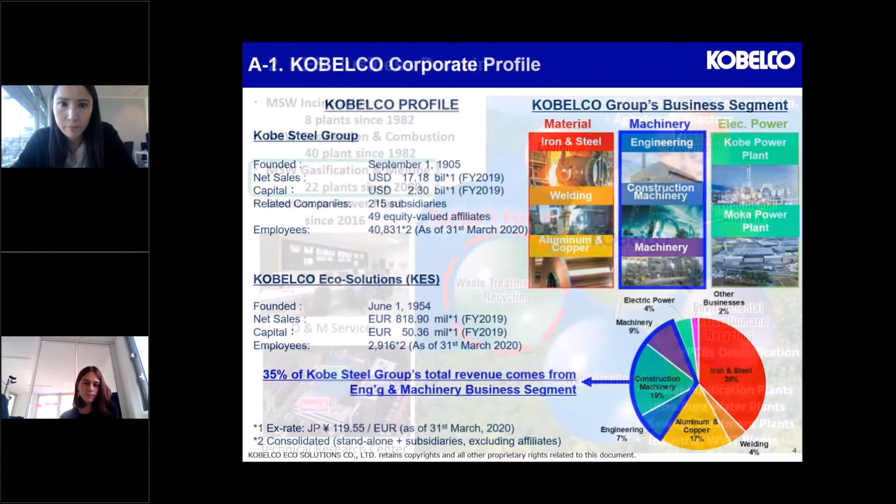Our main business is so-called environment plants. Our core business is water treatment plants, which I will talk about more later. We also do environmental restoration and recycling, such as PCB detoxification; process equipment, including glass lined reactors and hydrogen related business; environmental analysis and cooling tower. Lastly is our focus, which is waste treatment and recycling.

We have a couple of technologies for waste treatment. We have 8 incineration plants since 1982. Also we have 40 plants of gasification and combustion since 1982 as well. And lastly, the technology we will be introducing today, the fluidized bed gasification and melting furnace plants, of which we currently have 22, the first plant starting in the year 2000.

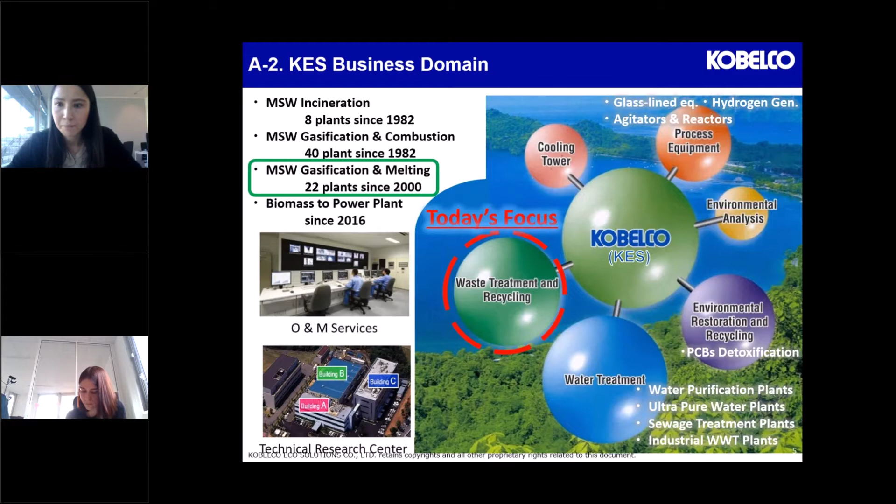This is just to focus a little more and show our water and waste technologies from top to bottom. Regarding water treatments, we have water purification plants, including tap water and sewage treatment plants for wastewater from large to small scale, including industrial water. Then we have sludge treatment plants for the residues of wastewater treatments. This sewage sludge can be fed to a waste to energy plant, which will be explained later.

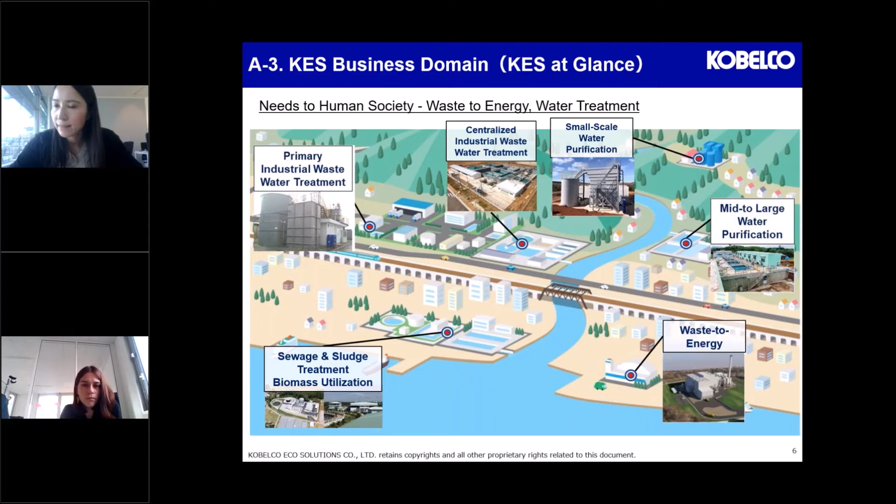Most of our business has been inside Japan for decades. However, since around 10 years ago, we have started to expand overseas. Mainly in Southeast Asia, we have offices in Vietnam, Cambodia, Myanmar, and a project office in Thailand. Also, we have 2 waste treatment plants by licensing in South Korea. And the most recent office, opened in 2019, is in London, in order to expand our business in Europe.

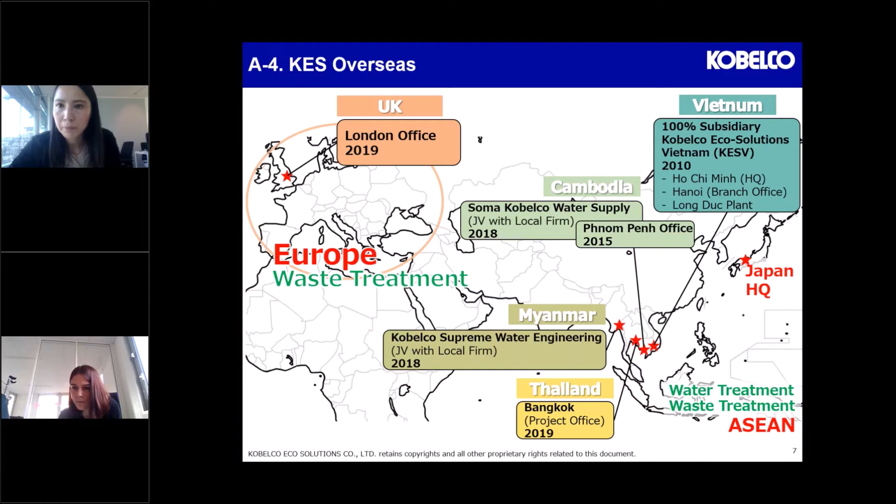These are the list of all the fluidized bed and melting furnace plants in Japan.

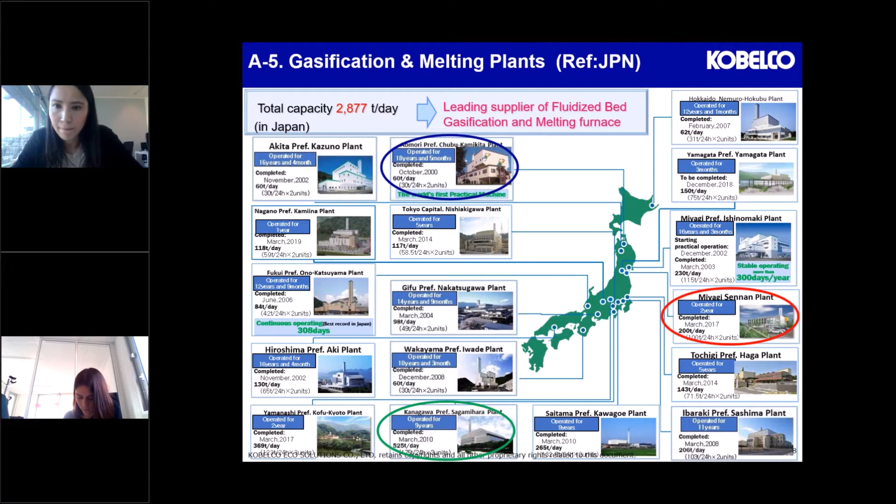Outside Japan, we have plants in Thailand and 2 plants by license in Korea. Most recently, the Hooton Bio Power project in northwest England, just south of Liverpool. This is our largest plant, processing with 2 lines, altogether 600 tons of waste per day.

Feedstock pit has a capacity of 240,000 tons and is able to export 200 gigawatt hours per annum. Construction is at its final stage. Drying out castables has just finished, and waste should start being fed within March, possibly even early next week. Very exciting time for us.

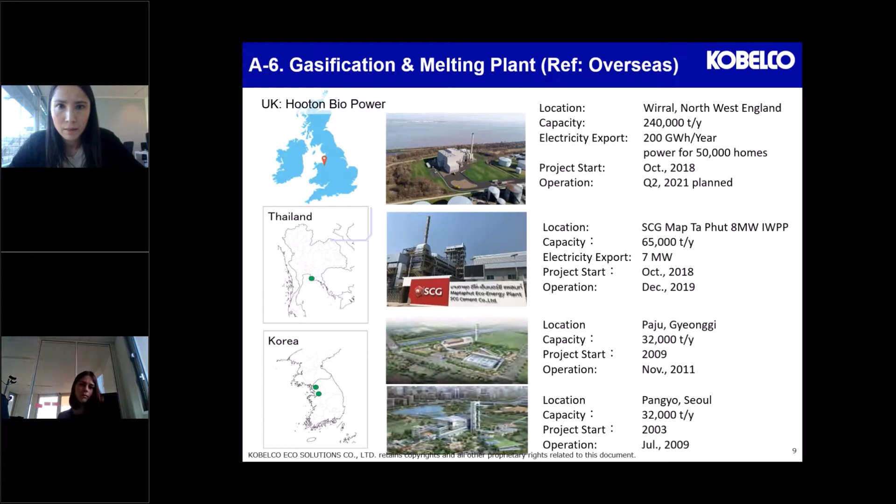Before moving forward, a quick description of our waste treatment technologies. We mainly have three types, as I mentioned briefly before: grate type incineration, with 8 plants; fluidized bed gasification combustion, with 40 plants; and fluidized bed gasification and melting furnace plants, with 22 plants.

One advantage our gasification melting plant provides is that only limited pre-treatment is needed. The feedstock needs to be shredded to approximately 15 centimeters by 15 centimeters, but that is almost all that is needed.

This means we can take a wide range of waste streams, including residual MSW, C&I, and fines from RDF, which otherwise would be landfilled. Based on experience in Japan, feedstock also includes water sludge, waste dug out from old landfills, and bottom ash from grate incinerators.

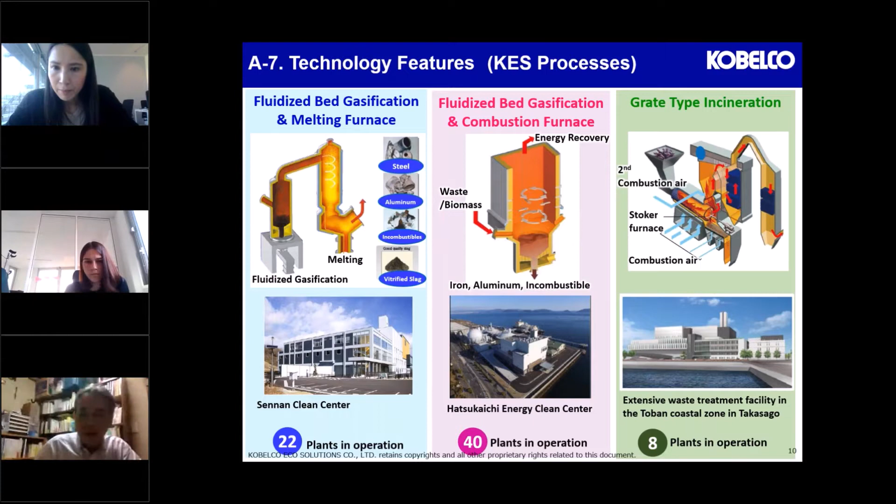Another main factor which makes the technology special is its byproducts. First, we are able to recycle metal, such as aluminium and steel, from the gasifier. The metal comes out clean and dry, making it easy to handle for its next life. In some cases in Japan, they feed metal waste intentionally to clean it up.

Also, after the gasification process, vitrified slag is produced from the melting furnace. This vitrified slag, a new material in Europe, is fully expected to be given end-of-waste status under the EU Waste Framework Directive. Tests are being carried out in the UK.

Currently, technologies to make use of vitrified slag are developed in Japan, such as asphalt pavement, blocks, and so on. By reusing the vitrified slag, potential landfilling can be avoided.

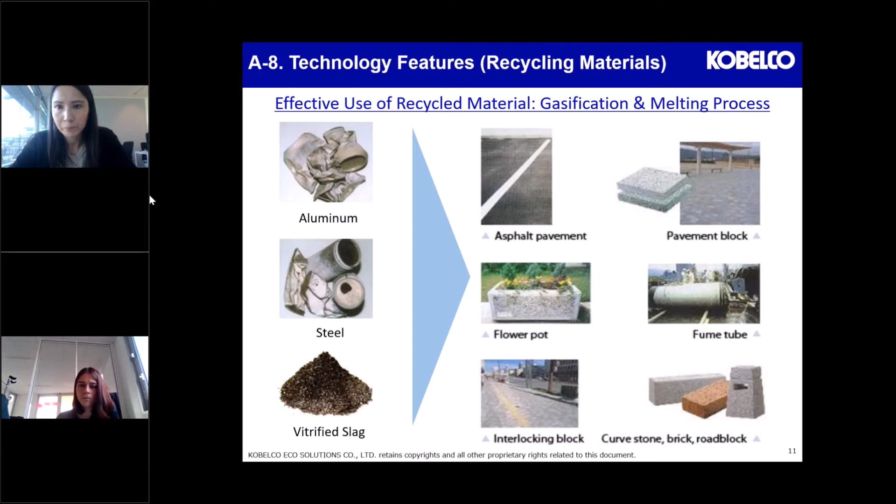To conclude the overall picture: we get good thermal recycling, waste flexibility with minimal pre-treatment, which leads to producing recycling materials and reducing landfill. We also accept unusual feedstock, such as fines from RDF, and do not require support fuel such as coke to be added. This is a proven technology of more than 20 years with 22 records.

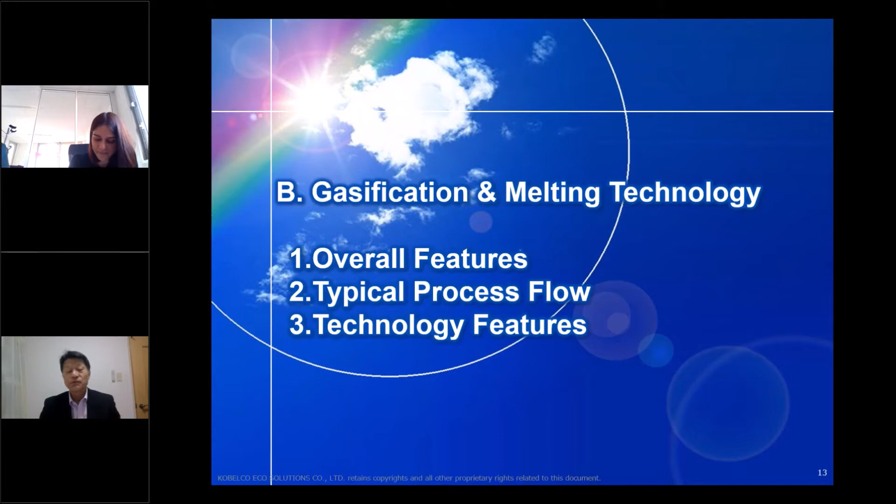I am working from home today, comfortable with no mask, but apologies for being without a tie. I am very pleased and honored to have this opportunity to present our technology. I will talk about KOBELCO gasification and melting technology and plants.

Since the 1980s, KOBELCO had many references in fluidized bed incineration plants for MSW or sewage sludge, and developed gasification using our high-efficiency combustion know-how in the 1990s.

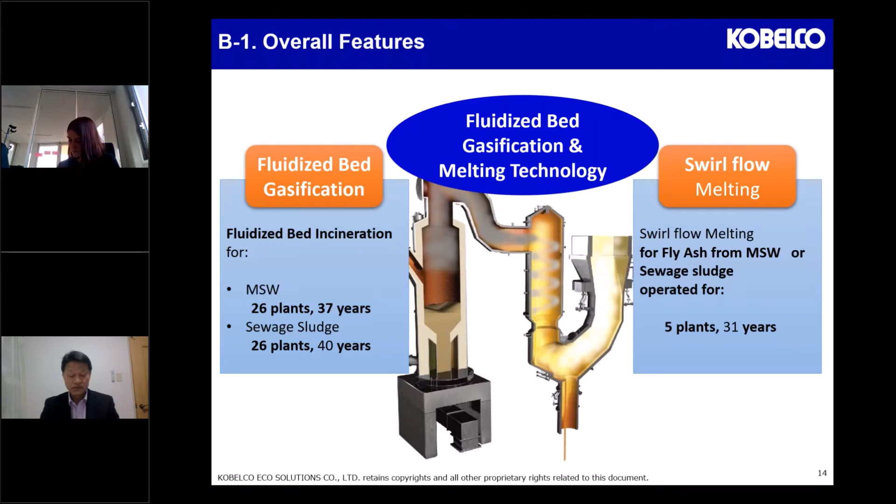KOBELCO had many references in swirl flow melting plants for sewage sludge from the 1990s, and integrated ash melting without external fuel into the MSW sector, utilizing waste's own calorific value by gasification. In 2000, KOBELCO launched the first fluidized bed gasification and melting plant in Japan. Since then, we have accumulated know-how and experience through operation and maintenance of those plants over 20 years.

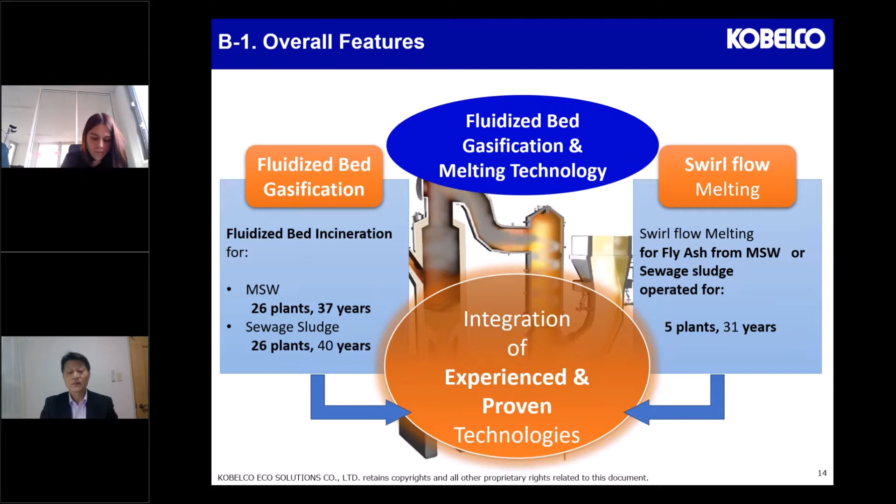Now the details of the process. The plant consists of waste feeding, gasification furnace, melting furnace, boiler, steam turbine and generator, flue gas treatment, and an induced draft fan to keep the system under negative pressure.

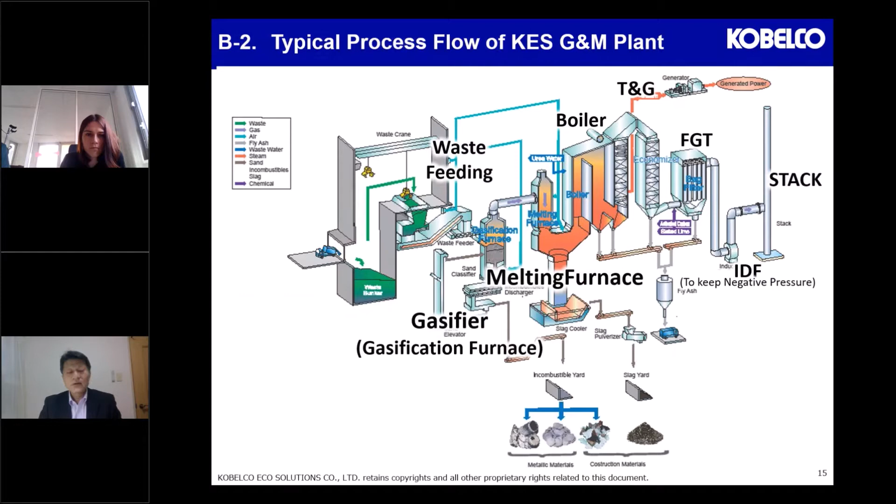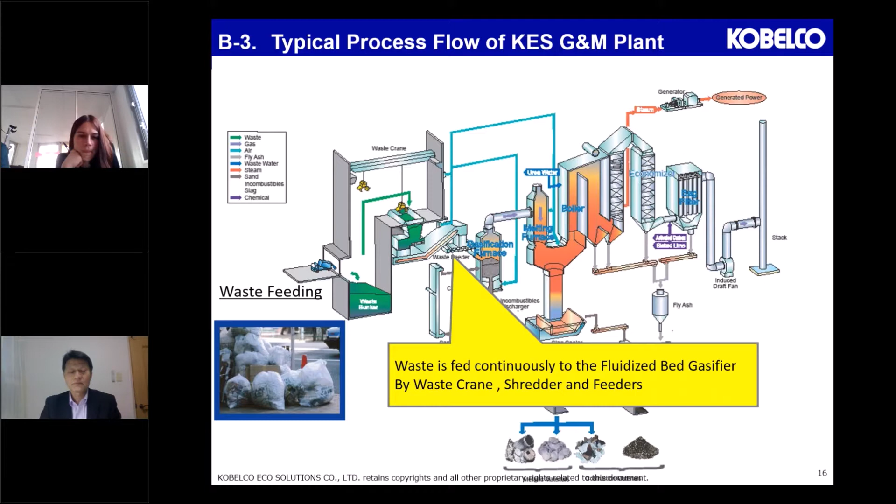In the waste feeding section, MSW or commercial and industrial waste is fed continuously to the gasifier by waste crane, shredders, and feeders. The gasification furnace is cylindrical and contains sand at the bottom. Fluidizing air is injected into the sand bed. At initial startup, the sand is heated by a burner to around 500 to 600 degrees Celsius. No further external fuel is required after startup—waste burns by itself, with no mechanical moving parts.

Combustibles are gasified into syngas—hydrogen, methane, carbon monoxide, etc.—which goes to the melting furnace along with ash, tar, and char from the top duct. Material recycling is achieved as well: incombustibles and sand are withdrawn from the bottom of the gasifier, aluminum and ferrous materials are recovered, and sand is returned to the gasifier for reuse as fluidizing sand.

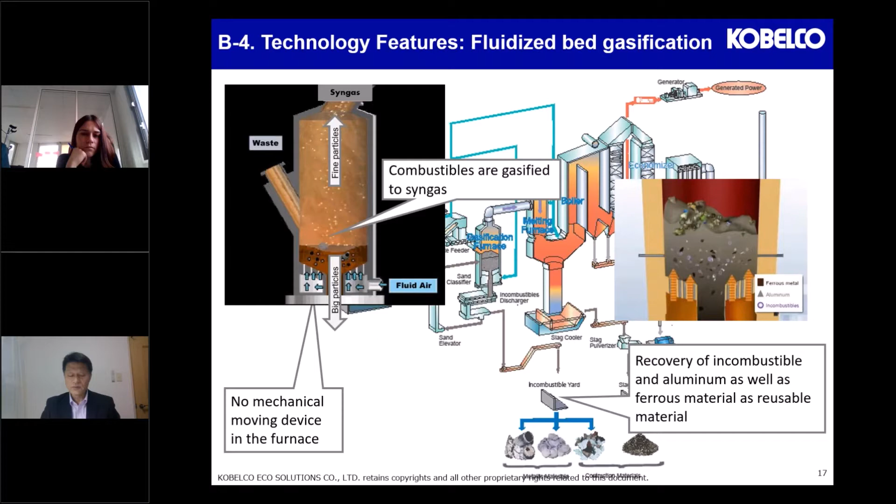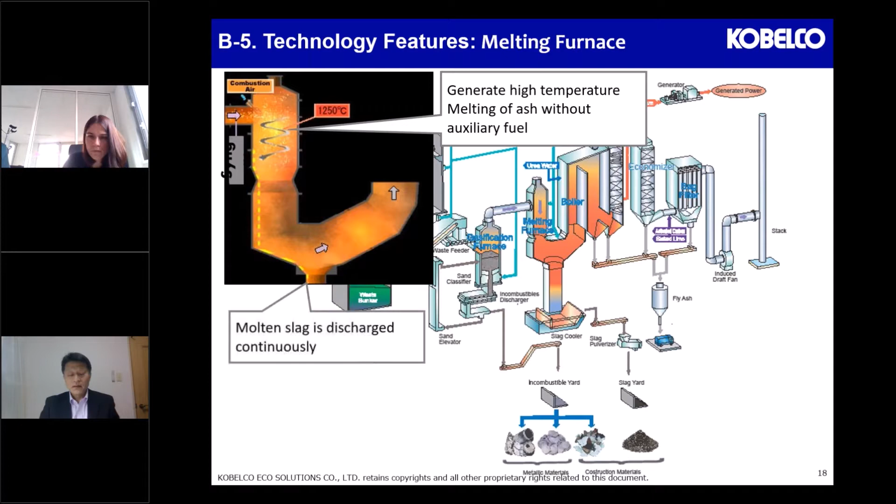In the melting furnace, both thermal and material recycling are achieved. The melting furnace is cylindrical with a water membrane and internal castables. Additional air is injected from the top, and syngas is combusted to raise the temperature to around 1250 degrees Celsius, melting the entrained ash within the swirl flow melting furnace. Melted ash is discharged from the bottom and cooled by water, and the vitrified slag is certified by JIS, the Japanese Industrial Standard, for use as roadbed construction material.

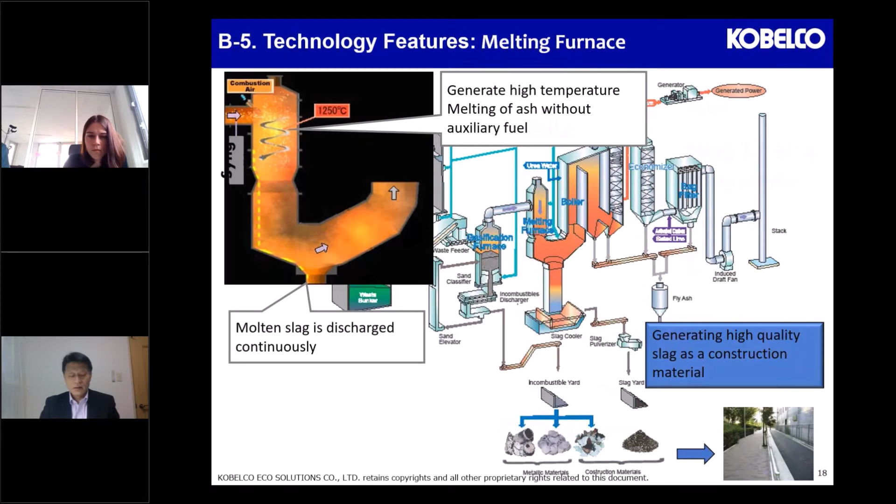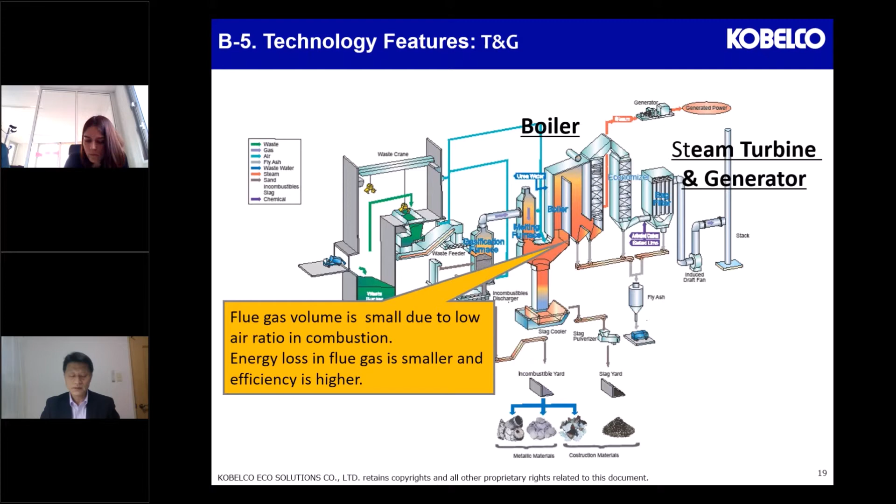Thermal recycling is achieved from the flue gas. Flue gas volume is very low due to the low air ratio from gasification in the furnace, so heat loss from flue gas is very small and efficiency is high. Flue gas heat is recovered by the boiler to generate high pressure steam, and electricity is produced by the steam turbine generator.

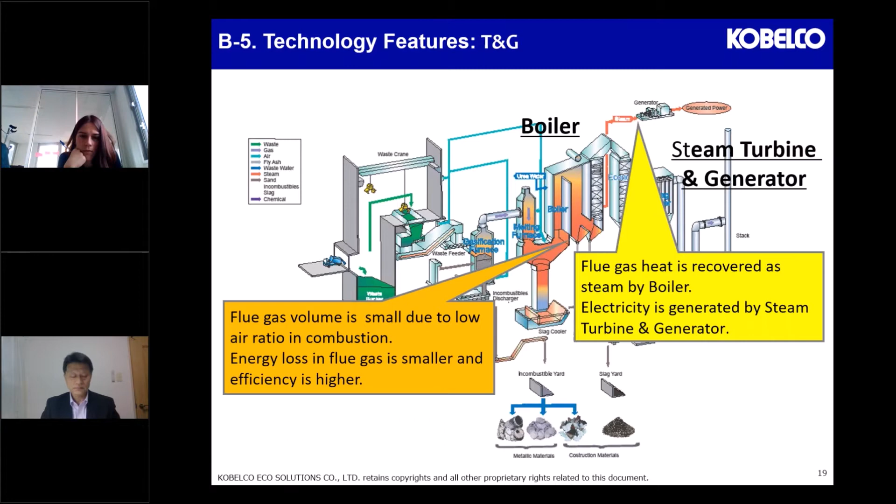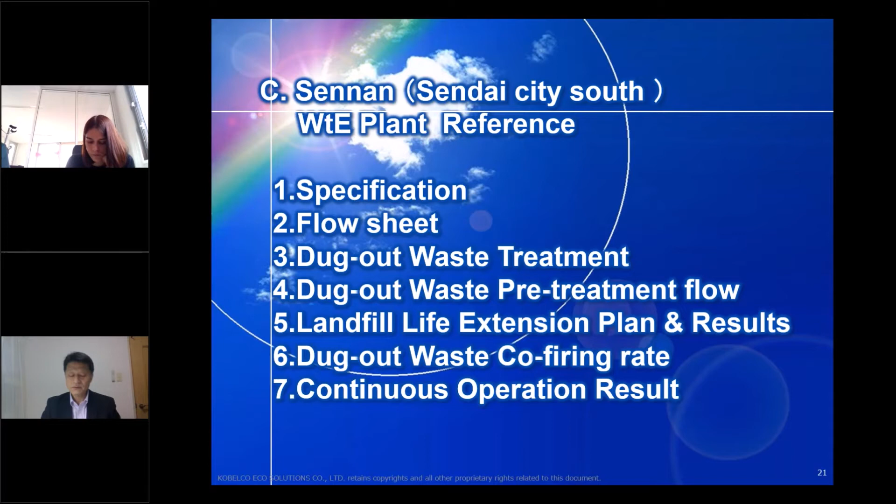Now, as a unique reference, I will introduce landfill-to-gasification-and-melting at the Sennan, Sendai City South Plant. We are the EPC plus O&M contractor under a DBO—design, build, and operation—15-year contract. The Sennan plant treats dugout waste from a nearby existing ash landfill to extend its life. I will talk about dugout waste treatment, landfill life extension, and operation results.

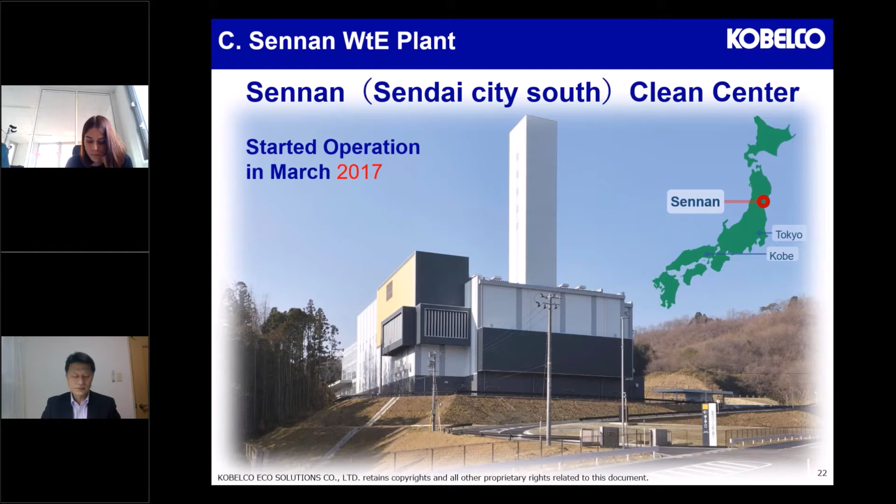Capacity is 100 tons per day, across 2 lines. Annual throughput is around 60,000 tons, equivalent to a population of 170,000 across 2 cities and 7 towns. Treated waste is mainly MSW, with small amounts of wastewater sludge, bulky waste, residues from the recycling center, and dugout waste. Boiler condition is 4 megapascal, 400 degrees Celsius. Flue gas treatment is by baghouse and selective catalytic reduction reactor. Generator rating is 3.2 megawatts.

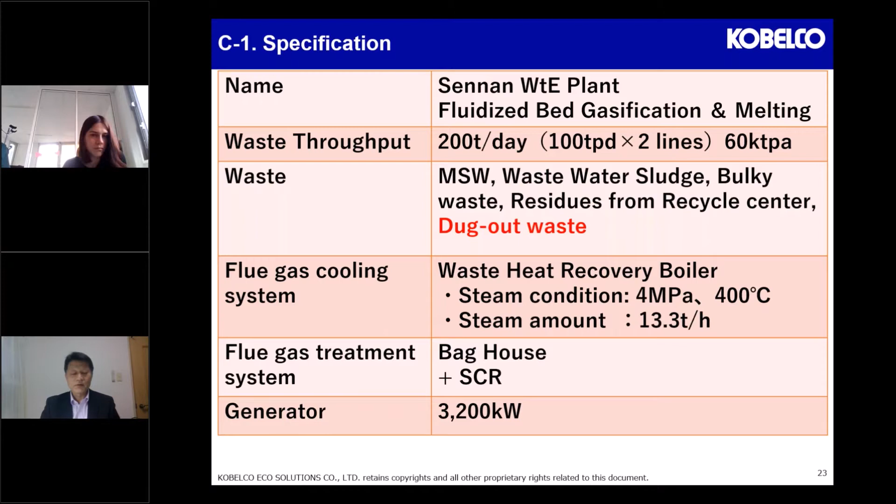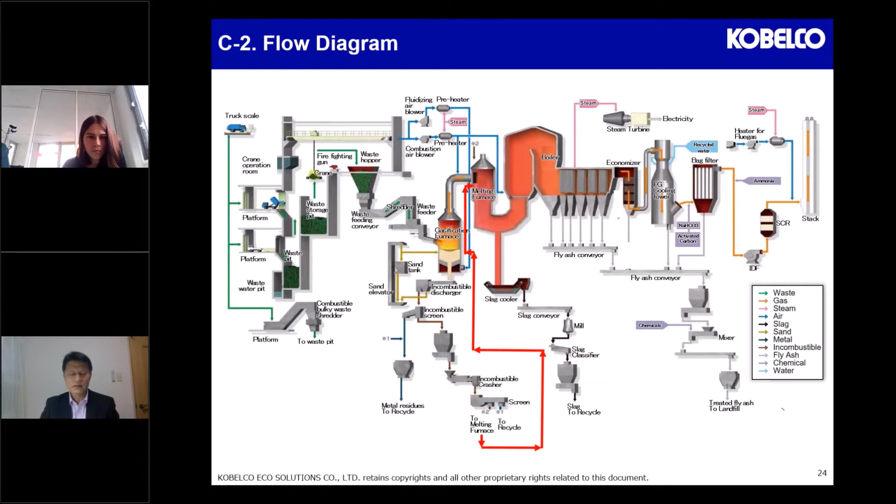This slide shows the Sennan plant flow sheet. The process flow is almost the same as shown minutes ago. One topic is that classified incombustibles from the gasification furnace are transferred to be recovered as additional vitrified slag in the melting furnace. Another topic is the flue gas treatment system, designed to meet stringent local criteria. Flue gas emission criteria by the local Sennan city requirement are far below the figures set by law in Japan. Nitrogen oxide is 110 ppm by law, but the local criteria in the Sennan city area is 50 ppm. That's why an additional selective catalytic reactor is installed downstream of the baghouse.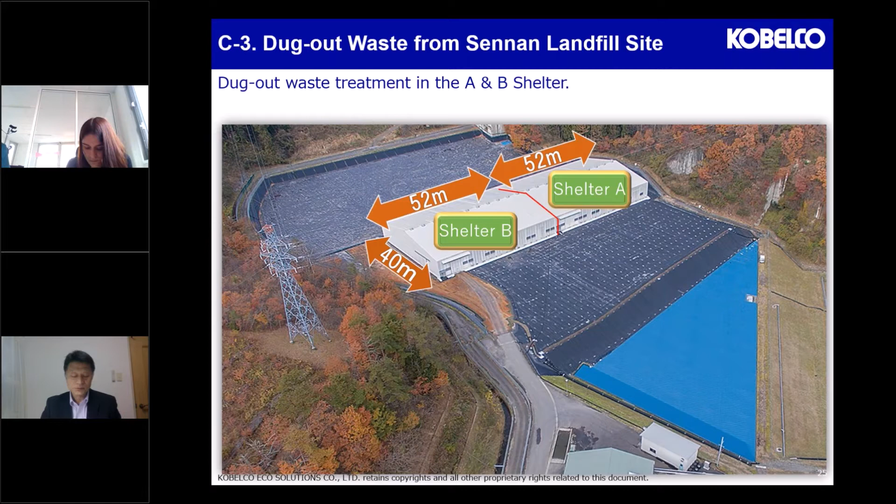For instance, the red color area is for landfill work and blue is the digging out work area. In area A1, when landfill work is completed, the shelter will be moved to area A2 for digging out work. In area B1, when digging out work is completed, landfill starts, and the shelter will be moved to B2 once landfill is completed. And so on, from A2 to A3 and from B2 to B3.

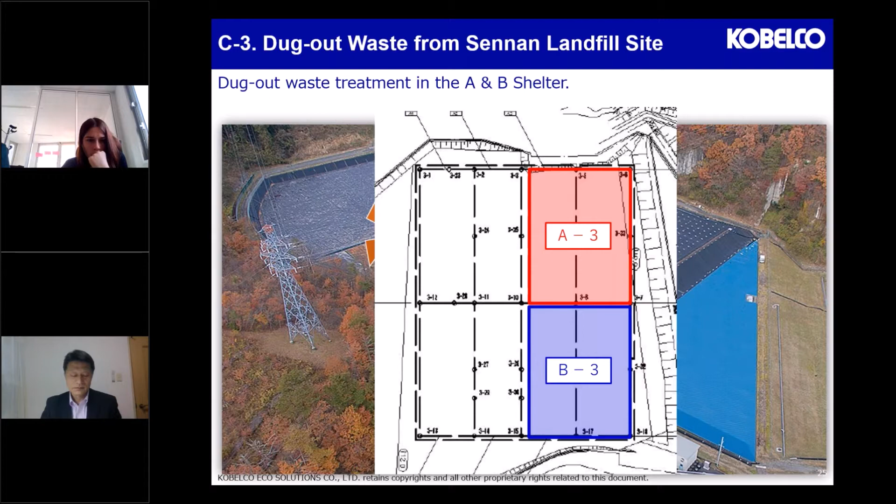This slide shows the digging out workflow at the Sennan landfill site. Landfill waste came from old grate incineration bottom ash, fly ash, and residues from the existing recycling center. Typical dugout waste composition analysis results are shown in this table. The majority is 70 to 80% ash, and LCV is generally quite small, with only a small amount of combustible residues.

Dugout waste is transported to a sorting area, classified by a trommel sieve with a 60 mm opening. Larger pieces are sent back to the landfill, while smaller ones are transferred and fed to the gasifier at the Sennan plant. This dugout waste has been treated by our gasification and melting plant and recovered as vitrified slag since 2017.

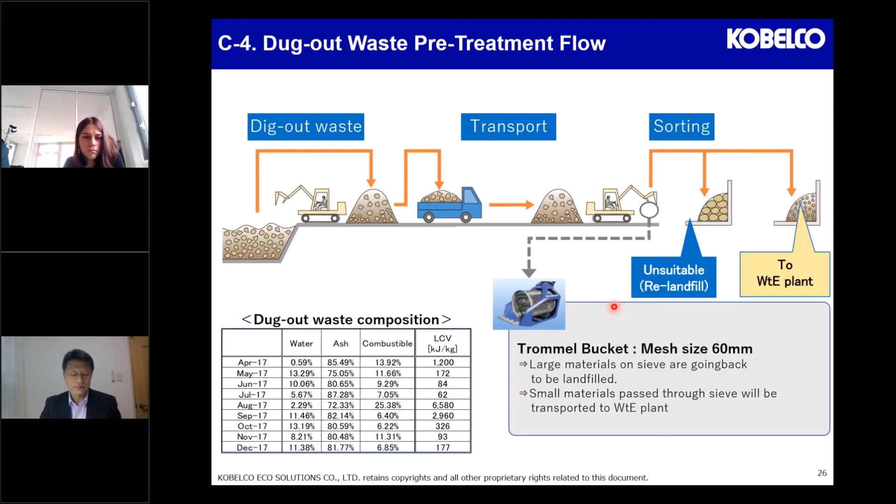This slide shows the digging out plan at Sennan landfill site. The red dotted line shows the no digging out case. Landfill started 20 years ago, and as you can see, the landfill area was supposed to be full and finished in 2019.

The blue line shows planning for the digging out case, and the orange line shows actual results up to last year. By digging out work, approximately 16 years extension can be achieved, and we almost achieved this as planned so far. This small drop was caused by suspension of digging out work last year as a consequence of typhoon disaster waste

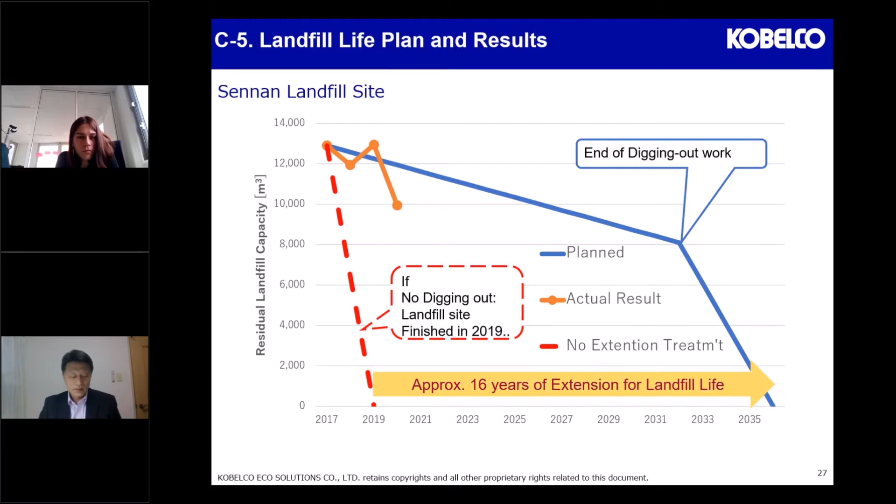treatment activities. This slide shows dugout waste, co-firing ratio, etc. The blue bar shows actual dugout weight per month, and it is around 100 to 300 tons per month, depending upon yearly and monthly waste treatment plan at Sennan plant.

Planned co-firing ratio was supposed to be below 5%, exactly 4.6%, as shown in the red line, while actual co-firing ratio shown by the orange line is good enough, around 5%. And the treated total ash ratio shown is around, expectedly, 10 to 15% as a result, as shown by the gray line.

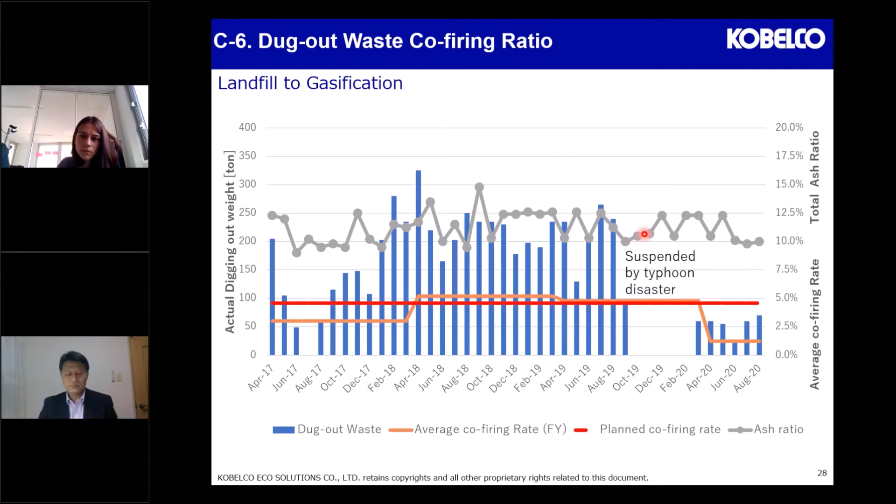This slide shows the operation result in 2019 to 2020. We achieved continuous 268 days operation, equivalent to around 6,500 hours, to treat MSW plus dugout waste safely and stably until the planned shutdown period.

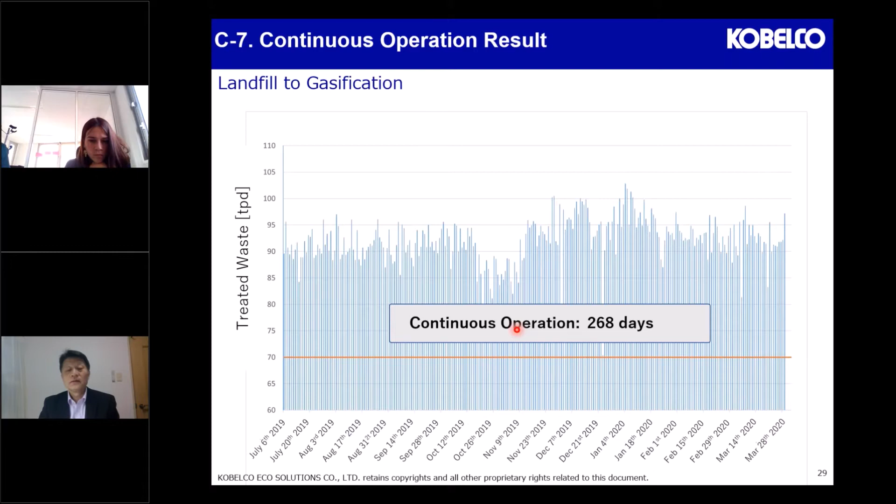Okay, this is a different subject. For your information, the international project scheme. In Japan, we are working as a prime EPC O&M contractor. On the contrary, in EU states, we are not familiar with local rules, so we'd like to work with experienced EPC partners in EU states.

During the EPC phase, we provide basic engineering for gasification and melting technology, for equipment supply, for performance guarantees. We provide erection and commissioning supervision, plus support from our Kobe Research and Development Center on demand. Operational supervision will be provided with our O&M experiences through remote service if available.

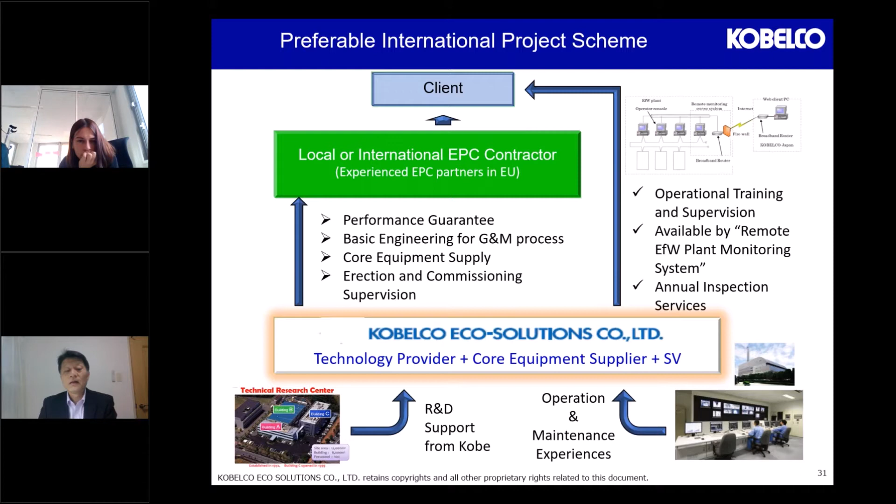Lastly, the summary and conclusion is shown. By our reference of fluidized bed gasification and melting plant, we achieved thermal recycling, high efficiency power generation, and material recycling. We get recyclable materials such as aluminum, ferrous materials, and slag. We achieved continuous stable operation, reduction of final volume for disposal, and landfill life extension.

And just a tip of information, we can accommodate high calorific value waste up to 16 megajoules per kilogram by our gasification melting plant. And I'm pleased to conclude today's presentation that we can create a sound recycling society by our fluidized bed gasification and melting technology.

Throughout our business activities, we would like to continue to contribute to global and local communities with a sustainable future. And, as in our company vision, to keep the earth sky blue, KOBELCO ECO-SOLUTIONS, KES.

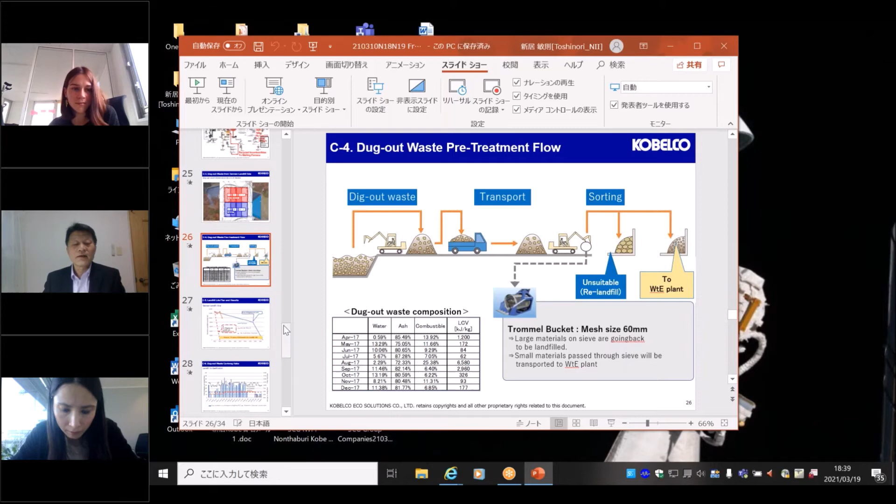Once the dugout waste is converted into syngas, what is the LHV of it? You're talking about after co-firing with the dugout waste, the syngas calorific value, you mean? Yeah, exactly.

Actually, that does not affect much. As I said, the combustibles are within the range to have syngas calorific value over 2 megajoules per normal cubic meter. That is the criteria for calorific value of syngas, I believe, in the EU states as well. Even with co-firing of dugout waste in operation, we do not see any much difference in the operation for gasification and combustion.

You use all landfill waste, sorry, I'm just reading before the question. Okay, so that's the question: you use all landfill waste, and you only use material that is smaller than 60 millimeters. So do you burn dangerous waste?

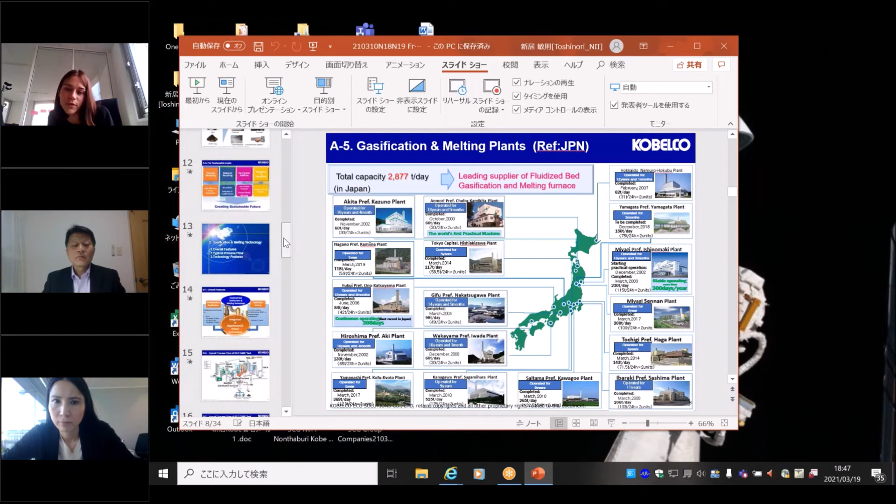So thank you for the interesting presentation. About the bottom ash recovered in the FB furnace that is then vitrified, what is the temperature to achieve vitrification of the material? Does it need further treatment like maturation, carbonation, etc., as traditional slag?

Maybe the question is about the temperature in the melting furnace? Yes, to melt the ash requires 1,250 degrees Celsius and over. The other question was, does it need further treatment like maturation, carbonation, as done for traditional slag? No, not required, no further treatment required.

Could we imagine your system using biomass such as wood waste? Yes, of course. Have you done it before? Yes, and we actually have a biomass-based power plant in Japan by ourselves, generating 7 megawatts of electricity utilizing local wood chips to produce power for the local community.

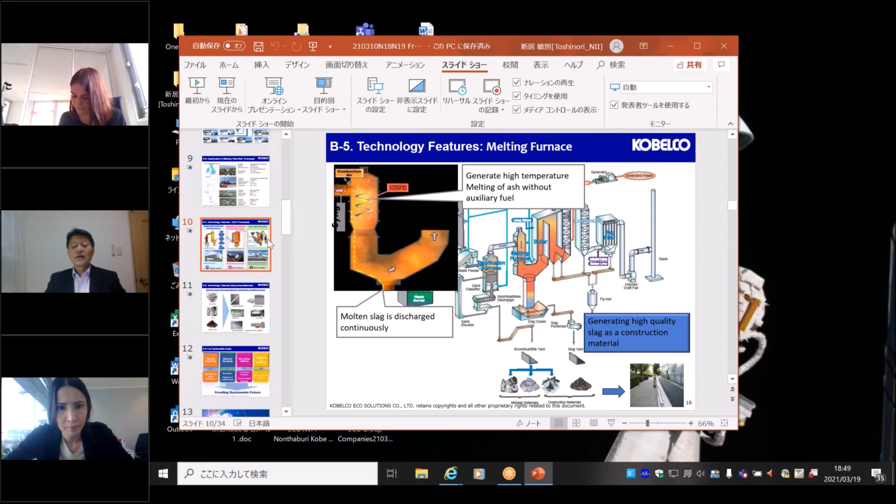In Japan. Is it traditional combustion or gasification in this case? Gasification and combustion, which Naomi explained in her slide. This center fluidized bed gasification and combustion furnace can be used for waste as well as biomass.

How are you managing your smoke treatments? Do you use chemical components? What did you say again, please? How do you manage the treatment of the smoke, the waste smoke? And do you use chemical components, etc.?

Smoke means from the stack or exhaust gas? Exhaust gas, yes, that would be better. Exhaust gas treatment is like this: bag filters, and sometimes a catalytic reactor is required here. I cannot catch the meaning of the question, sorry, what did you say? It's only like, what kind of technologies do you use to treat the exhaust gas?

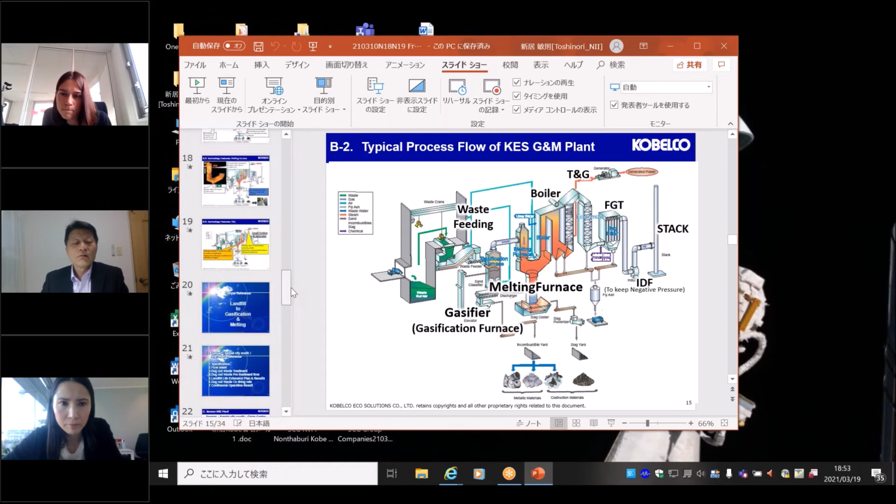Talking about the injection of air into this type, you mean the fluidizing air, continuously fed to the sand bed. Sometimes if the operation is wrong, temperature goes up and sand is sintered, like clogging, yes. So especially in the first plant overseas, we need to be very careful about the skills of the operation, and if that is automatic versus manual control, we need to be very careful about that for the control group.

Sometimes, yes, clogging happens here - a big amount of cluster, or long steel wires, clogging and accumulating here. Sometimes, yes. So it's also a maintenance issue from time to time. Yeah, that's right.

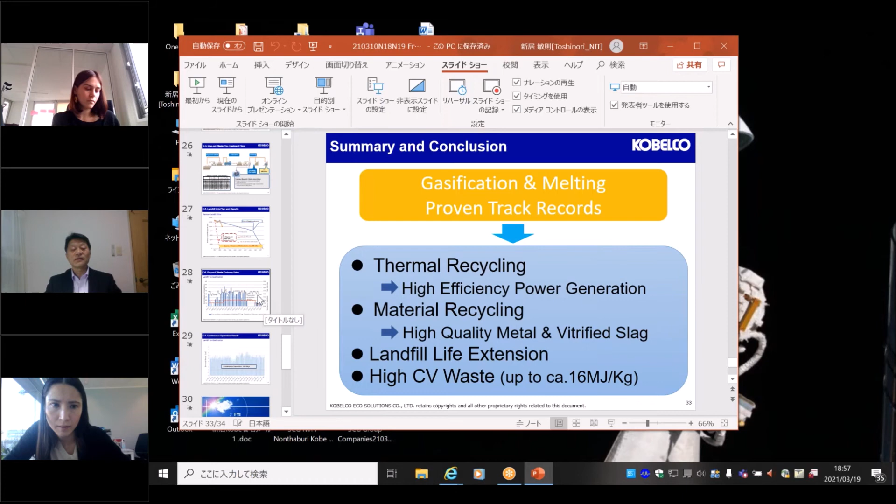And if you need further reduction in NOx, I can't give you the exact figures, but it depends on the criteria. We need to talk about the OPEX also, for the amount of chemicals needed.

No problem. So what is the global efficiency of the Sennan plant? Overall efficiency in Japan is not a very good one, but in the UK or EU, with waste regulations, it's over 25%. Overall 25% to 30% - it's very dare to say, but 25 to 28% overall efficiency can be achieved.

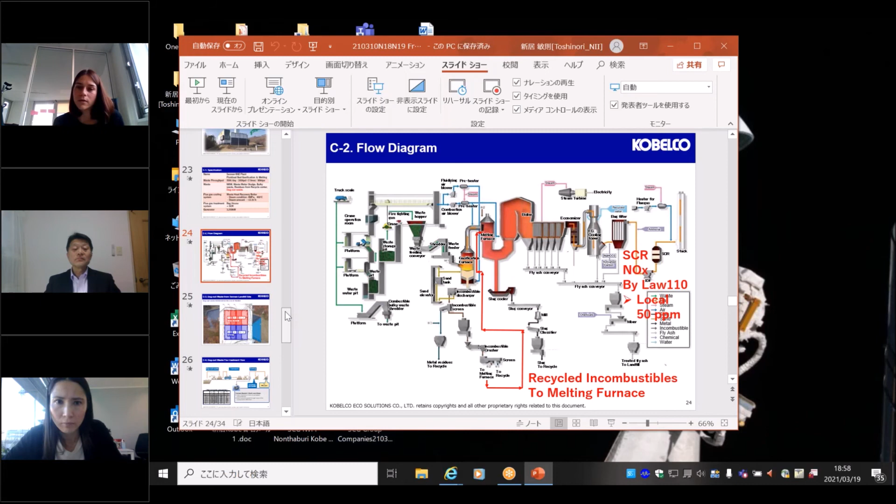I had another question from someone who's not here today but wanting to know - what is the difference between KOBELCO and other Japanese solutions? First, the efficiency you were talking about - was that electrical efficiency, electric production, or really the overall efficiency?

If he's talking about the gasification technology only, other Japanese technologies use carbon additives, and we do not use carbon additives - that's a very big difference. In relation to Japanese other gasification technology, they use cokes. The calculation method is very much different, so it's not appropriate to compare the efficiency with or without carbon additives. So since we don't use it, ours can seem lower than other technologies that are using fossil additives. That's right, yeah.

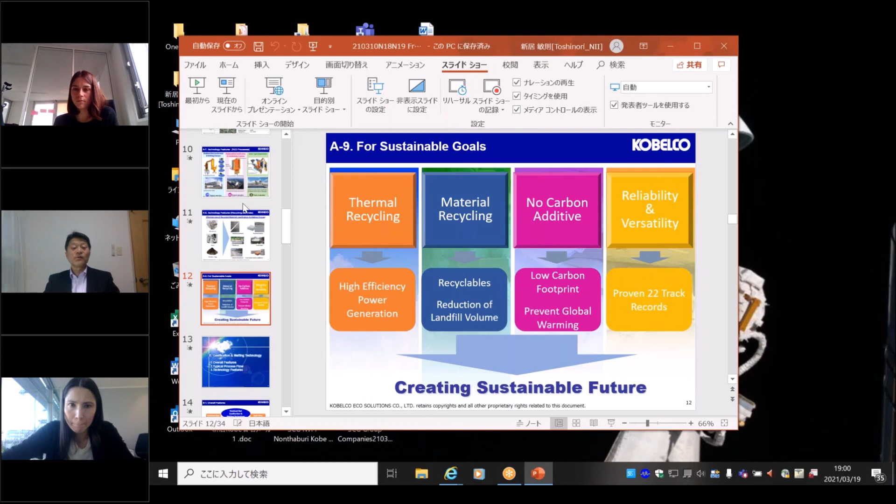What is the difference between KOBELCO solutions and other Japanese gasification solutions, such as Ebara, Nippon Steel, JFE, etc.? The two big Japanese companies use carbon additives, while the other one does not use carbon - a very different conception. They have internal heat recovery pipelines in their furnace, and sometimes face blockage problems. In our gasification furnace, there are no mechanical moving parts or internal pipes, so we proudly say our system is very robust and simple compared to other technology suppliers in Japan.

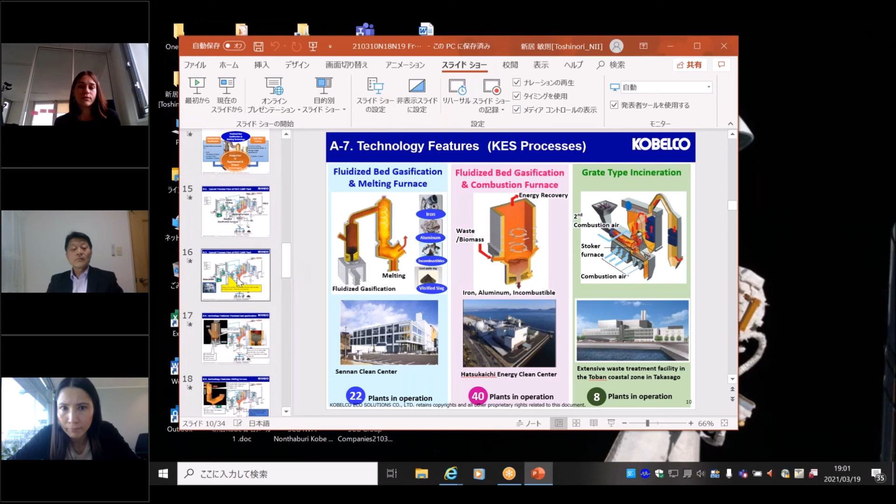Okay, thanks a lot. So a participant asked about the quality of waste and didn't really understand your answer. Could you summarize the main specificities and characteristics of the feedstock that can be used in your gasifiers? You mentioned maximum chloride and sulfur compounds of 1%, and moisture. What else could you say? How about the preparation of the feedstock before gasification? What must you do to prepare a feedstock to go into your gasifier, basically?

Nami-san mentioned the size after crushing, in the crusher, to be fed to the gasifier, because of the fluidizing activity required inside. So the fuel should be shredded into pieces, say 6 inches, 150 mil. That is a very big difference from the others - to achieve good fluidizing activity and good efficiency in gasification, we require the fuel to be shredded.

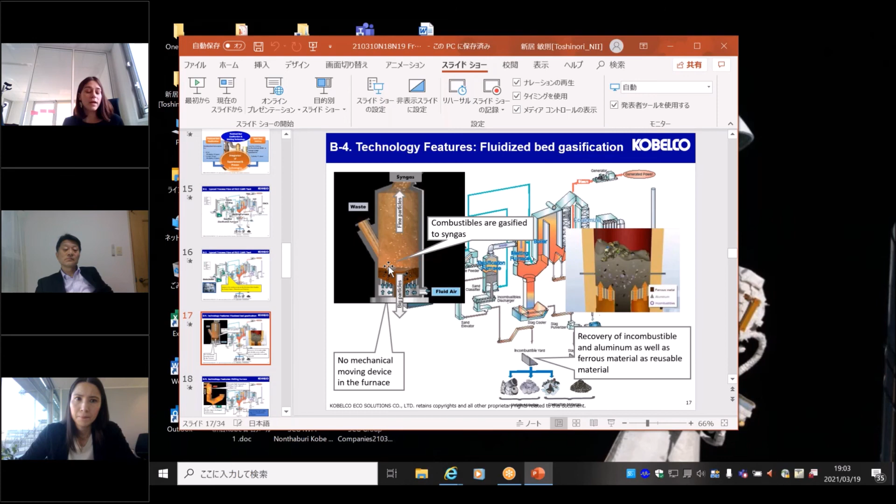What about before that - what sorting specificities do you have for the waste? Sorting depends on the requirements for recycling, I think. That should be done to meet future criteria, so you need to remove plastics, cans and bottles first. Theoretically some sorting should be done, but we can put it in here and after we have the shredder, so we can accommodate it - but please do not put in hazardous items, or a bowling ball. No bowling ball can be shredded, so that type of thing should be sorted out.

A bed mattress has many springs, and we cannot accommodate such waste, large bulky stuff. Does it make sense as an answer? Yeah, it makes sense. I don't know if the person who asked is okay with this answer, or if someone wants to speak and ask this question. For me it was clear. I think it's clear, thanks a lot. I think it's okay. Okay, so I think I'm good with the questions.